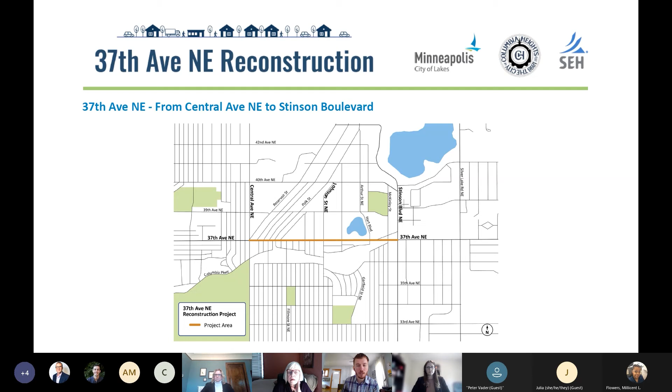Welcome. Great. So before we jump into the layout, I just have a couple of slides here of project background that we've maybe seen before, but it's been a while since we've been here, so I just wanted to go over that again. The project, 37th Avenue Northeast reconstruction. It's from Central Avenue in the west to Stinson Boulevard in the east. It's a truck route. It's 1 lane in either direction with parking on both sides. It'll be a complete reconstruction.

The project background: it's a 2023 project, will be constructed in 2023. Complete replacement of the pavement, curb and gutter with a sidewalk on the south side and a trail, likely on the north side. The improvements to the corridor include safety improvements for the street, greening and other stormwater enhancements.

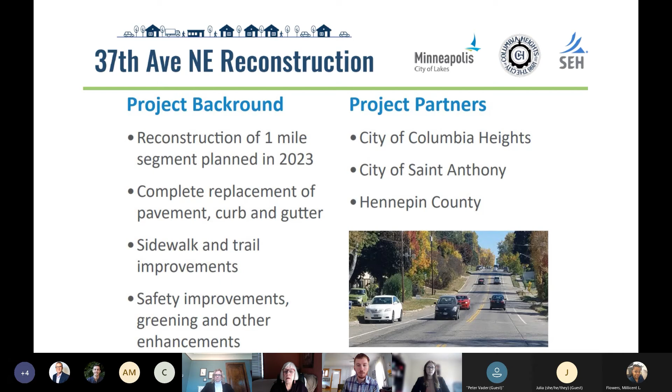There are several project partners. The City of Columbia Heights is a major partner in the project because this project borders Columbia Heights, so they therefore have jurisdiction over half of the roadway. And then the City of St. Anthony has jurisdiction in the east, at the east limit of Stinson Boulevard, and Hennepin County because Stinson is a county roadway as well.

Next slide. Our project goals are to improve safety for all users of 37th Ave Northeast, no matter how they get around, to connect employment centers and truck corridors. This project is near the freight and intermodal hub, Northeast at Central and 28th. Provide substantial investment and transportation benefit to those users as well. And for the project schedule, the 2018 regional solicitation was where we received federal funds for the project.

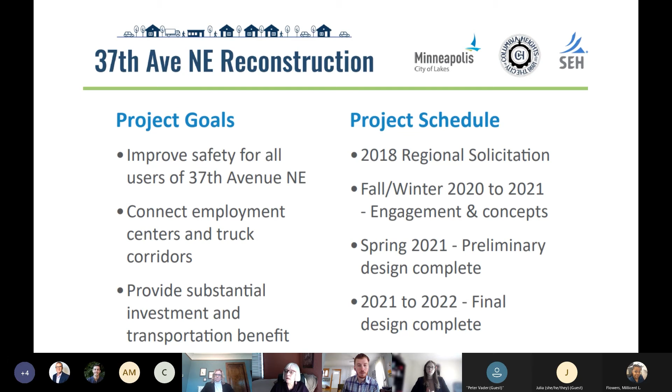In 2020 and early '21, we've been doing engagement and developing concepts. And then spring of '21, which is now, we'll be developing the concept design and finalizing that and going through layout approval early summer. And final design will begin shortly thereafter. Okay.

With that, we wanted to highlight a few things and share the current layout with you. We believe the last time you saw this, there were actually two different options, one with a trail on the south side and one with a trail on the north side. Since then, we've proceeded with the trail on the north side of 37th, mainly because of that connectivity to the existing trails on 37th to the west, as well as existing trails off of 37th to the north at Stinson on the east end of the corridor.

As we run through the layout, we'll talk about things like turn lanes and safety, green infrastructure, truck routes and accommodating those particular trucks, pedestrian refuge island, the railroad crossing, and transit. Just want to caveat this by we are still having conversations about a lot of these things with the various stakeholders and agency partners. Some of this coordination is continuing to go on, and so we welcome any feedback that you have throughout this process and comments on the layout.

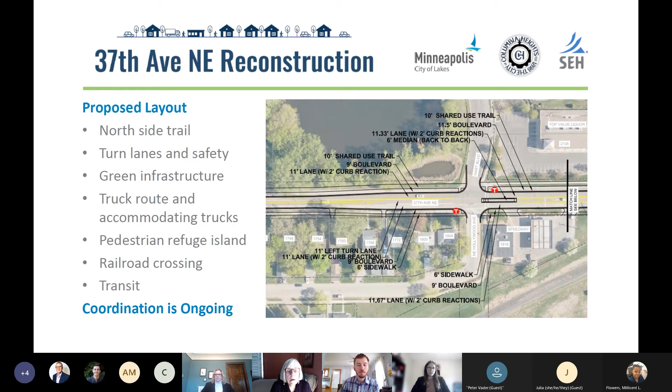With that, I'll share my screen here. And just nod if you can see it for me.

Thank you. All right, we're going to start on the west end of the corridor here at Central Avenue. There's that existing shared use trail on the northwest quadrant. And with the trail on the north side of 37th, we'll be connecting into that. Some particular items to note at Central Avenue, we are adding left turn lanes at these locations. And the main reason for adding the left turn lanes is mainly a safety perspective.

What we've been noticing with crash history at this location is that people coming up behind a vehicle might not notice that someone in front of them is turning left. And so there are a lot of rear ends. And not only that, but if people are turning left, they tend to accelerate through that pedestrian crosswalk because they're worried about someone coming up and hitting them from behind. So in adding the left turn lanes, what we're really focusing on is aligning them across the intersection so there's good sight distance and sight lines to any oncoming vehicles, as well as people walking or biking or rolling, and hopefully eliminate some of that pressure to make that turn and accelerate through that crosswalk location.

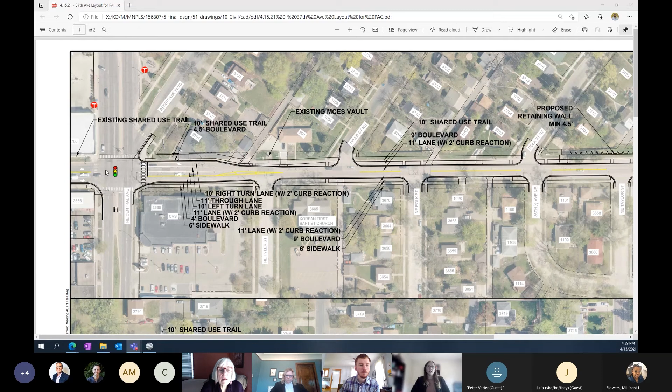Another thing to note, 37th Avenue Northeast is a truck route. And Minneapolis just released their new street design guide. So with it being a truck route, we're looking to accommodate what's called a WB40 truck, which is a semi-truck. It's not the longest semi-truck, it's a shorter one. But it does have impacts to our intersections, particularly at some of these major intersections like Central Avenue. So I'll zoom in on that. And if you have any questions, please feel free to raise your hand, or if you're on the phone, just hop in and I can always stop and pause and we can talk through some things.

So one of the instances here is in adding the left turn lane and the through right. Some of these trucks are tracking over the existing curb ramp, so we've widened this one out just a bit from existing today. And the one that has the most impact is this southeast quadrant here from existing. What's happening is that semi truck having to make that turn from this left lane without impacting the left turn lane, since we've shifted the lanes to the south. It's encroaching on all of this space. So in order to accommodate them, we've tightened this up as much as we can to make this a compound curve, but it is impacting that ADA ramp in this location. We can still fit it within the existing right of way, but it's one of the impacts.

Another thing here, we're retaining the right turn lane. It's a pretty heavy right turn volume across the trail, over 250 or 200 vehicles per hour. So we want to make sure that we allow those people that time to pause and not worry about someone coming up behind them and rear-ending them as well. And then we've pulled the trail back here to provide about 6 feet, just to provide some additional queuing space to anyone who's crossing 37th.

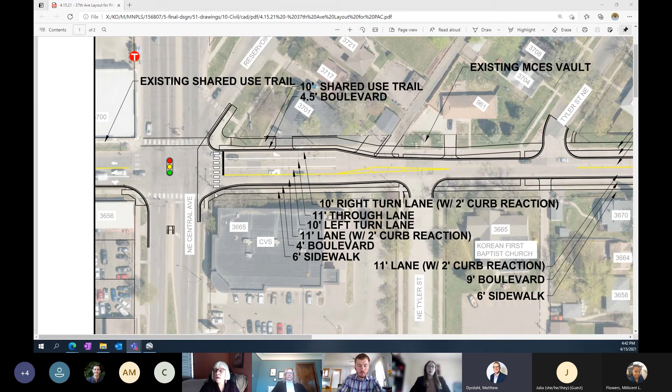Does that make sense? Yep, we can take a look at it and just see what it would look like to put it in here, and then have some discussions. I know there have been a lot of discussions around, number one, making sure that we can maintain it, and that's feasible, and also recognizing that this is a MnDOT intersection as well, so we'll have to have some coordination with them. Cool. Thank you. Yep.

And then Julia. Hi, I'm also concerned about that corner. I'm wondering if it's possible to enhance the crossings to the east of that, and also to the south, except that's outside of the project. Waiting on corners like that tends to be super miserable. Being able to anticipate that you might need to cross earlier and have a really clear crossing where there's only 2 lanes instead of 4 lanes of vehicle traffic might be a good option.

And as I was looking at that, I'm also noticing that we're not seeing all of our legal crosswalks provided in this schematic. So that might be later on, but. The marked crosswalks through here. If we could do marked crosswalks on Northeast Tyler, both sides, so that people are anticipating that. And overall, it's looking like we're not seeing our ramps and our legal crossings. So on this east leg here. Yeah, and then again on the other portion of Tyler heading north.

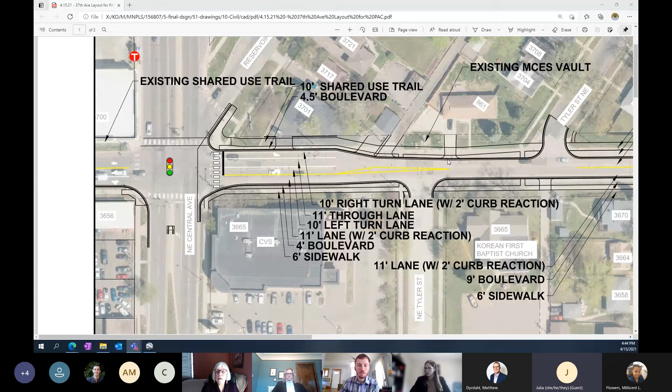And painting the crosswalks as well, so that there's an alternate intersection for people who use that route regularly on foot. That's something we can take a look at with the traffic staff. Anything else?

Oh, Aaron's got in. Yeah, thank you. So this was something I saw, especially in the segment that's coming up, but there are many more curb cuts on the north side than on the south side of 37th Avenue Northeast. I understand the connectivity to the trails to the west of Central and to the east, but I was wondering if you were considering the number of places where vehicles would cross the multi-use path on the north side versus the south side, and secondarily, making sure there is not cross slope on the trail when conditions might be icy because of the number of curb cuts.

Sorry, give me just a second. I'm making some notes.

Related to cross slope and some of those crossings, one thing I want to note is that we are having conversations about raising the trail, particularly at major crossings, to help with some of that, as well as to indicate that conflict. For the minor crossings, those would probably be your normal pedestrian ramp, but it's something we'll take into account moving forward as we get into grading, and how we can handle any ice or sheeting of water across the bikeway.

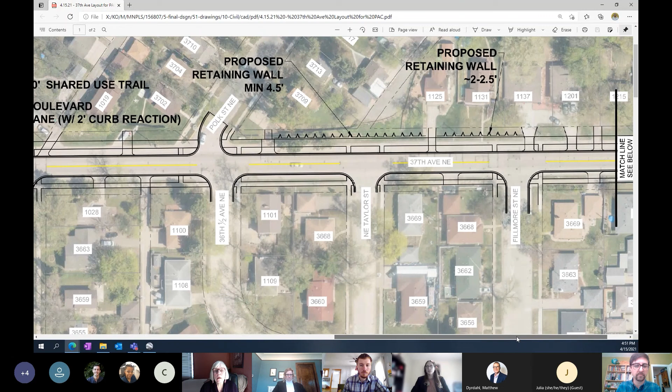So as we go through here again, you can note the crossings, but if you have any comments, please let us know. Some of these are skewed intersections as well. So we just tried to do our due diligence, some engineering judgment here in terms of where we're replacing them. But if you have different thoughts, we're open and welcome to those ideas. All right, I'll slide down here.

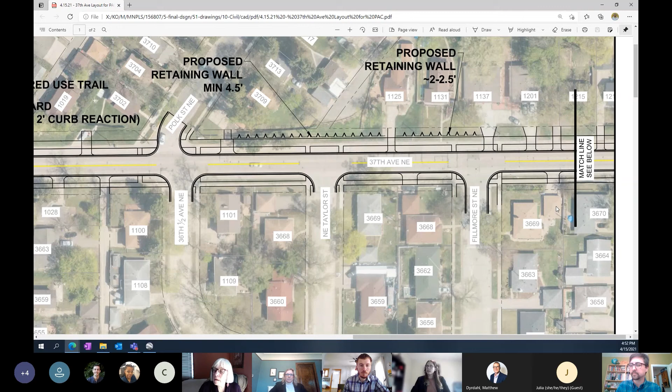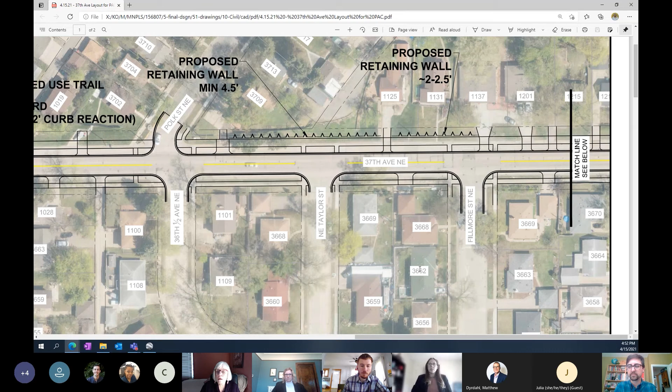Oh, I was just pointing out the attempts to realign that Polk and tee that in more. There's attempts to try to change some of those skewed locations where we can, and tighten up some of that geometry. I think that's important just to share. Yep. And even on the south side, some of these streets were recently reconstructed, so we're tying into some narrower street widths, and we're looking at tightening up those curb radii wherever we can.

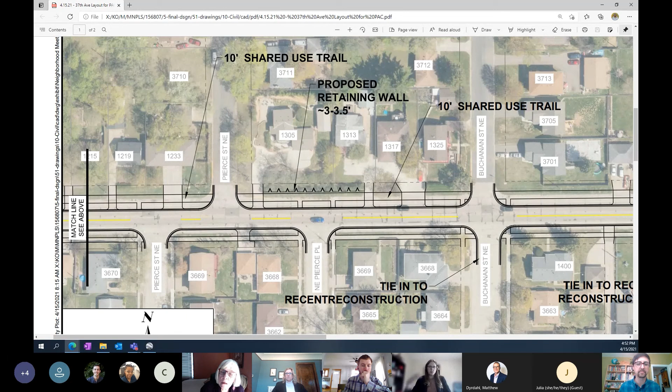When it comes to some of these minor cross streets, we're taking a look, making sure the school bus and garbage truck can still get in there, but not that larger semi. That one's going to encroach more. All right.

So coming along here, here's an example. You can see Pierce Street, just the different pedestrian crossing locations. We've got another driveway location here, driveway up here as well. So we put a pedestrian crossing on the west side over here. And then we've got 2 crossings here at this Pierce, but we were just running into driveways for this particular leg here in order to get that to work.

Julia? Julia, I think you might still be on mute. This mute thing is throwing me off.

I'm sorry. We're not seeing the east side of Pierce Street Northeast where it south tees, or the west side of Pierce Street where it north tees. So just not seeing the crossings provided where we're supposed to see them is a bit alarming to me. And I'm also curious, given that driveways are functionally curb ramps in how they get used by a lot of people in a lot of circumstances, what exists for situations like this to make it able to serve both functions potentially?

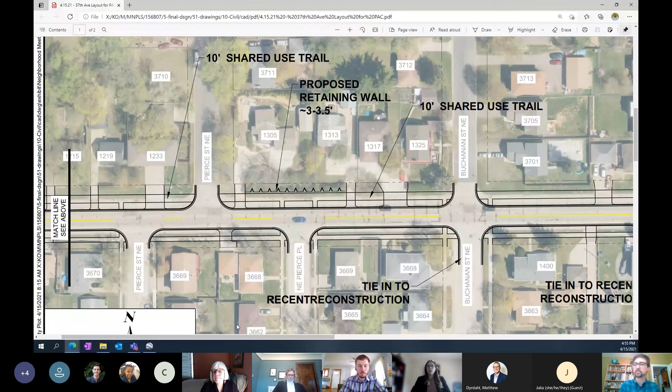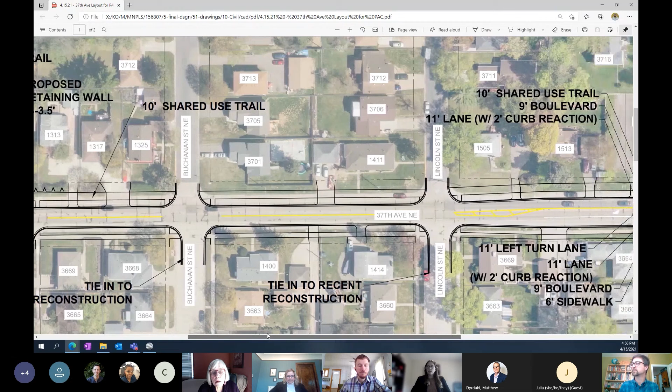All right, moving to the east. Here are those locations on Buchanan and Lincoln where we would be tying into that recent reconstruction. Sorry about this spelling. So that's why you can see it's just not aligning quite with the curb. And then as we get to Johnson Street, again, this is going to be one of our more major intersections. The Route 4 bus actually turns at this location. So it comes north and heads east, and when it's westbound, it heads south at this location. And then we start having our transit route to the east of Johnson Street.

One thing we did add again here was those left turn lanes. Again, from that safety perspective, reducing that risk of that rear end crash as well as that urgency to make sure you're making that turn pretty quickly. And then when we were looking at these curb radii, again, we were looking to accommodate that larger semi truck, given that it is a truck route. And then we were looking especially at a bus or a slightly smaller vehicle like a box truck. It's an SU30, to make sure that it can make this turn without encountering any vehicles that might be sitting in the left turn lane, and they can do that without any problem.

One thing to note is that at Johnson Street, we are looking to create a little more boulevard space here before tying into the existing sidewalk that's directly adjacent to the curb. Number one, we need to get some signal equipment in there, but also it just provides a little buffer space for us to get those ADA curb ramps and grades to work, as well as just a little more pleasant experience for someone walking along the roadway to not be directly adjacent to motor vehicle traffic.

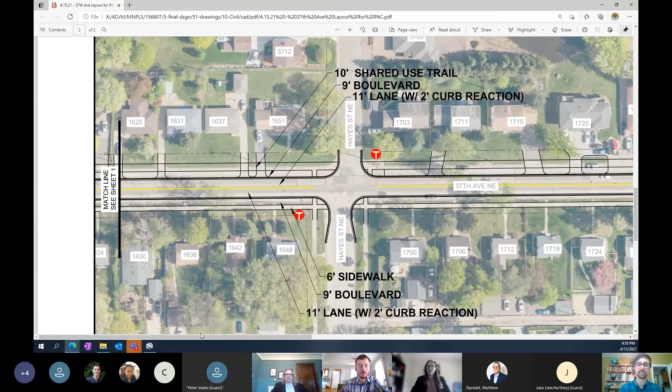We've got Hayes. Hayes has some of those transit locations, those stops along here. Those are marked with the red circle, white T, I should say. And then as we get over here to Hart Boulevard, one thing that you'll see that we've done, we added a left turn lane in here. And that is mainly because we were looking to try to get a pedestrian refuge island at this location where there is more of a desired crossing from people taking transit to get either to the Speedway or to the neighborhood over here or to these businesses on the north side.

So we've taken a look at providing that pedestrian refuge island and median. It's long enough so a bus would be sitting here queuing, and then one vehicle would be behind it. So ideally, it's preventing any vehicle from sneaking around the bus and heading into oncoming traffic as well.

One thing to note here is that we are going to be having some conversations with Speedway just to make sure that their fuel truck can access, because we're not exactly sure which way they're coming from and entering and exiting, and we want to make sure they're able to still function and provide that operation for their vehicles, because they're unloading their fuel kind of in this corner of this location. So we'll be having continuing conversations with them, and this could change a little bit as we move forward.

Mm-hmm. And north of here too, there's multifamily housing and senior housing too. And there's walking back and forth between this space. So this was a priority for Columbia Heights too, to have a pedestrian crossing at this location as well. That was currently not identified for a rectangular rapid flashing beacon or anything of that sort, but likely a marked crossing and possibly some advanced pedestrian warning signs. But we're still having conversations with traffic around what this will look like.

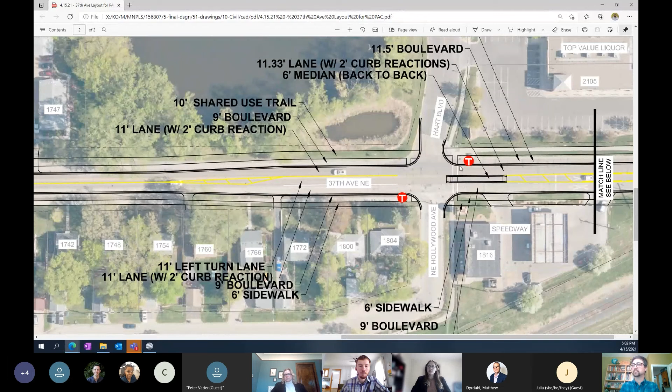We started with a slightly wider median, Matthew, to let you know. We took a look at the turning movements for an SU-30, that box truck coming out of here, thinking that if people are moving, it might be more of the vehicle that we're seeing, especially from the north side with multifamily housing. And so that's really what's controlling the width needed at this location in order to get those turning movements through. And that's why we had to narrow it to 6. But we can take a look to see if there's anything we could do on the north side, or we might be able to move the path a little bit and see if we can get some additional space there.

I'd love to explore that. Also, I guess what I'm wondering is, does the whole thing have to be a rectangle, or could it be a little more of a polygon and be 6 feet on the nose, but kind of go out to 8 and then be 8 feet on the east side of the crosswalk? I don't know. I just think it'd be interesting. Bikes are typically like 6 feet long, and that just feels too narrow if you're going to actually use it as a refuge. And I know it is a minimum, but anyway, those are my thoughts for now. But yeah, we'll look at it.

Mm-hmm. And this is one of those locations where we did pull that trail back in order to accommodate that 11.5-foot boulevard for possible BRT. Thanks. Yep. Any other questions, comments?

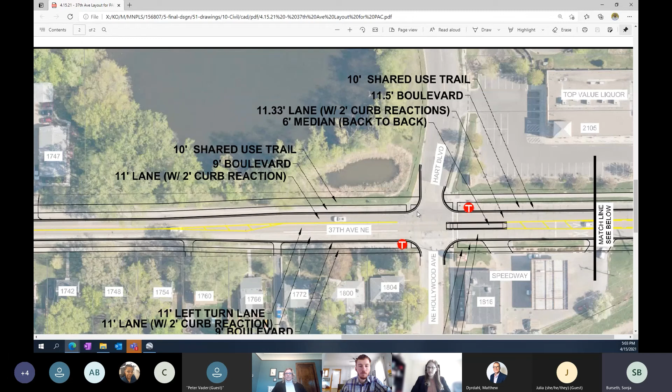Hi, this is Sonja Burseth, Metro Transit. I just have a quick question. Thank you for widening those boulevards. Is the 11.33 feet lane width, does that include the 2-foot curb reaction? That does not include the 2-foot curb reaction. Okay, so curb to refuge would be closer to 13 feet. Correct. Thanks.

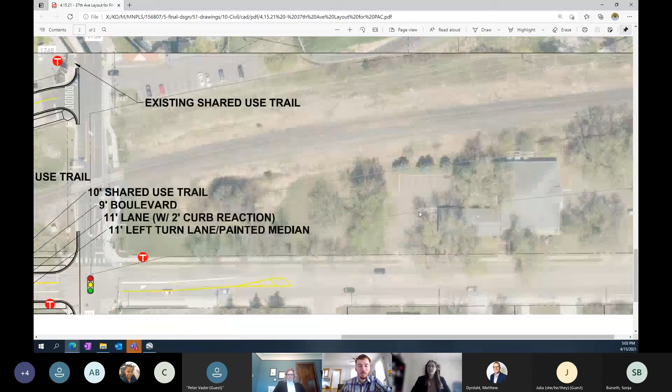All right, I'll slide down and over here. You get a sneak peek of the end.

All right, as we head to 37th Place, one thing that we were really looking to do was tee up this intersection here. With the angle that it's at, people are able to really fly through here and maybe not make a complete stop, especially having that trail on the north side. A couple of items that are still under consideration. Number 1, raising this crossing for the trail.

Number 2, we do have an option that we're looking at and considering that brings this trail back and offsets it from the intersection and then pulls it back toward this normal alignment. And so those are 2 options that we're considering and still having discussions at this location, especially knowing that if there's a train coming through here, anyone that's looking to get from Stinson heading southbound to westbound 37th can make this cut, as well as that reverse movement.

You'll see here, this radii here had to open up a little bit, and this was really to accommodate that city bus to make this turn around this corner. And then there would be at least one bus stop on 37th Place. They're looking to possibly consolidate the 2 existing stops into 1. Any questions or thoughts at 37th Place?

Yeah. One thing we were trying to consider, especially, is what are the movements that people are making, but we can add them. So we've added it up here right at Hart. And then the question here is if people are making this movement, do we want to encourage them to go on this side versus this side? But again, I understand, the legal crossing. So we can add the curb ramp in here, but it's more if people are here, they're looking this way and maybe not necessarily to the right.

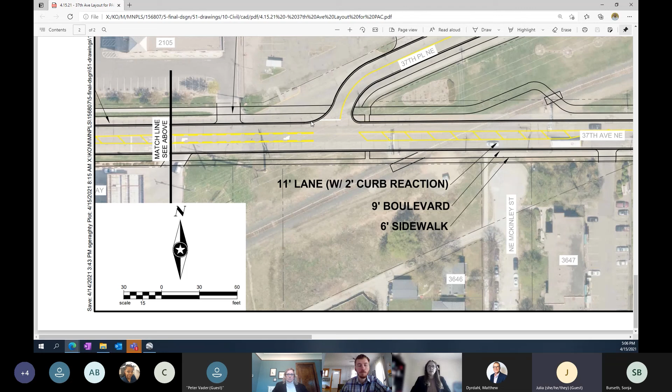Yeah, that seems like a driver problem, not a pedestrian problem. So it seems like it would be good to figure out how to encourage safe driver behaviors rather than limit accessibility for people using wheelchairs or with limited mobility. Okay, we'll look to see if we can add that back in here. And also some traffic control that would help drivers remember to look where they're moving their vehicles, if that's a concern. Yeah, I don't mean to sound sarcastic because I definitely experienced that. I just think that it's important to focus on the person causing the problem rather than the person being impacted in this case.

And Julia, one thing that's under consideration here is raising this crossing, as well as the possibility of offsetting this crossing to the back. But that wouldn't address this. Okay, correct. Would that be able to be tabled? That would maybe increase that visibility. It's something we could talk about. We haven't discussed it to date. Okay, thank you.

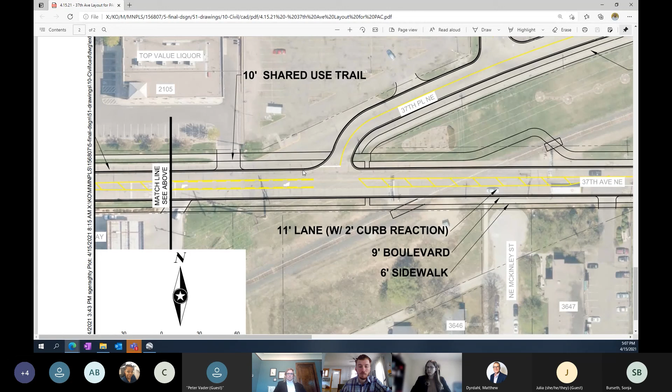Moving to the railroad, one thing to note is that sidewalk on the south side will be located outside of the existing gate arm. We had some conversations with Metro, with the railroad, and that was kind of their preference, but we still have to have conversations with MnDOT Rail as well. And so know that those are forthcoming.

The other thing that you're seeing here is the trail on the north side is using a 12-mile-per-hour design speed for a person biking to slow them down a bit as they're crossing the railroad, as well as provide them a better angle crossing the tracks so that their wheels don't get stuck, or if someone's wheeling in a wheelchair, their likelihood of getting stuck in those tracks is less as well.

Julia? Will there be an option for people to continue in the shortest line possible if they feel comfortable? Or what will the physical barriers be to prevent people from taking that desired line? Right now, there's no plan to carry an option straight across, because we do want to, number one, encourage people biking to slow down and look, make sure there is no train coming, as well as if they do encounter pedestrians at this location to also slow down. And we have not discussed adding anything to prevent someone from making that through crossing to date.

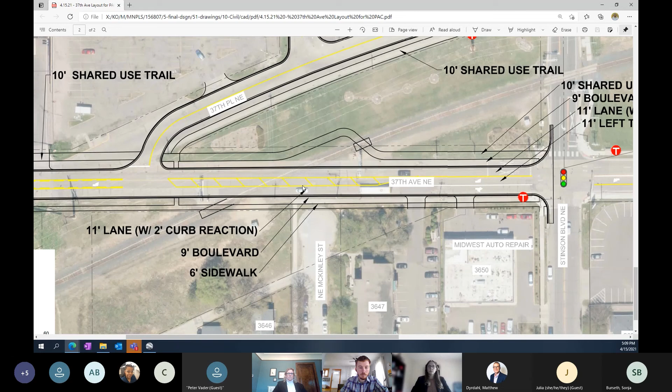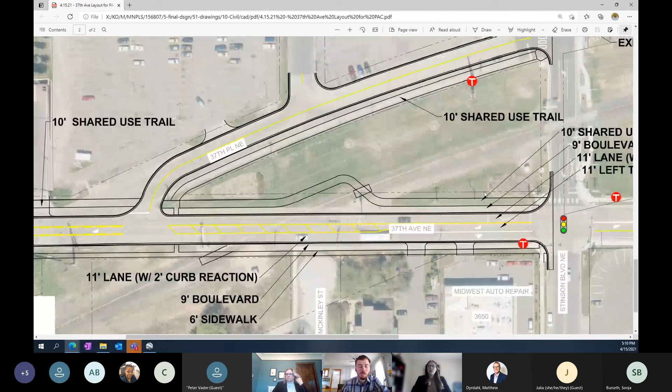The 10-foot shared use trail will also continue along 37th Place to make that connection to the existing trail on the north side of Stinson, on the west side of the roadway. And then it will carry again through here on Stinson Boulevard to eventually connect to a trail that will go along Stinson Boulevard in the future.

Something to note at Stinson Boulevard, again, we're looking at adding those left turn lanes from that safety perspective. One thing we're continuing to evaluate, and we have to have a meeting with Hennepin County and St. Anthony, is what that turning movement looks like on this corner, especially knowing that we're shifting those lanes down again, similar to what we were running into at Central, whether or not we might need to impact this quadrant or not in order to accommodate this.

Another option that might be on the table is to maybe shift this left turn lane a little bit to the north, but then we get some offset left turn lanes, and then we impact that sight distance of that driver making that left turn.

Julia? The sidewalk gap is not being filled on the west side of Stinson, however? Is that correct? Correct. That's not a portion of this particular project. And it can't be added in? Forrest, I'll look to you on that one. At the moment, it's out of scope. We can have a conversation with Columbia Heights. And it looks like it would fill that triangle so nicely. Yeah, it's another railroad crossing to contend with, but yeah, that's something we can bring back. Thank you.

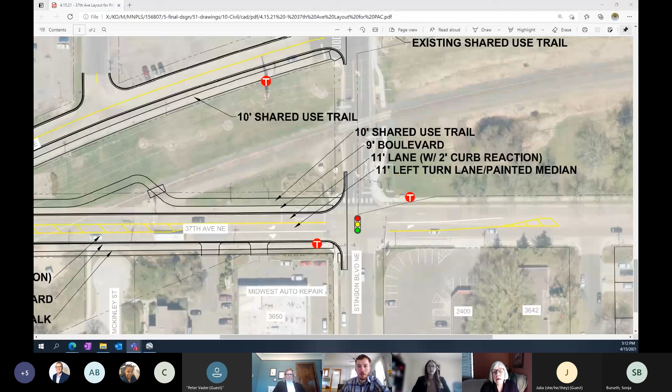So that's the entire corridor. So with that, we can open it up. Oh, Barb, you've got your hand raised. Yeah, I wanted to ask, Forrest, you said you're at 15% and you may come back if there are significant changes. Are you looking for a resolution from us today? Always the question, I guess, right? Yeah, I think if you all want to put together a resolution today, if you support our option here of the trail on the north side, it's the major thing to get by today. Or if there are other comments and questions besides the ones we've already talked about, you can add that to the resolution.

Aaron, did you raise your hand briefly? I was going to ask the same question Barb asked, so that's good thinking, Barb. You've run a couple of these meetings before, haven't you? On occasion, yeah. I just want to check with anybody that hasn't had a chance to share. I see Christopher Hoffer, you got a question, and Peter did, so.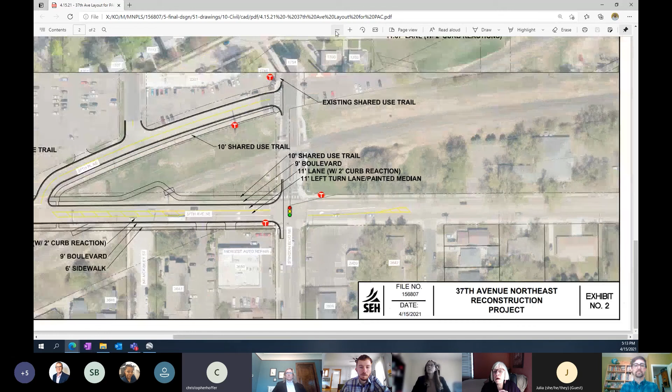Yes, and I apologize to make you go change slides, but could you go back to Central? I was looking to try to find the northbound bus stop. Is there a northbound? Okay, there it is. There's nothing to the south of 37th. Okay. So the northbound bus stop is up there, kind of by that gas station, huh? Okay, I couldn't tell where it was, and if that was changed to sort of accommodate buses turning eastbound off of Central onto 37th. Thanks for pointing that out.

Yeah, and correct me if I'm wrong, but I don't believe there are any buses making this movement, the north to east. Yeah, that's correct. This is Sonia at Metro Transit. That movement you did describe was at Johnson and 37th. I think this northbound Central at 37th stop, the reason maybe it's so far side is to not stop in that Reservoir Boulevard street that makes kind of a 5-leg intersection there.

Yeah, I was just curious if there was one to the south of 37th, because I just couldn't figure out how it would coexist well with the right turn accommodations for right turning semis. But thanks, I just couldn't see it before. Thanks. Yep. Gotcha.

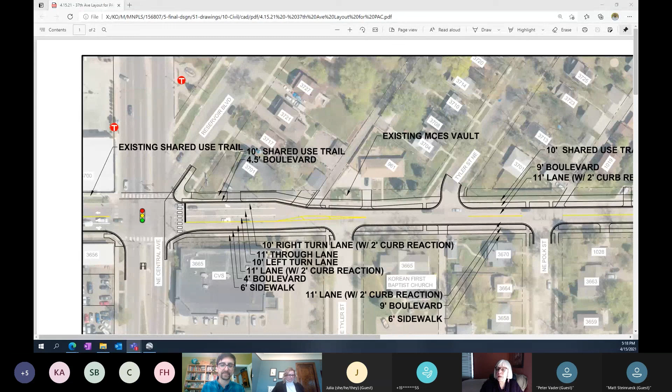Okay, well, we're early. Do we want to adjourn? Any other topics? Yeah, Matthew. Well, I guess as an announcement, I don't know if Julia has anything to say about the last couple opportunities to comment on Hennepin. That's exactly what Julia was going to say. Just a reminder to people, I might try to send something out to the whole PAC unless somebody else is, that the comment deadline is tomorrow. I already did the survey, and I signed the letter, and I will write an email this evening.